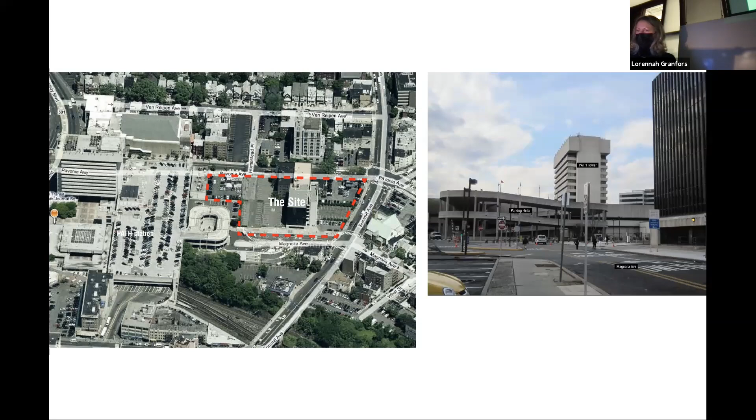I worked on this project with HWKN, in partnership with Handel Architects. What exists there today is two 82-and-change story residential towers. The third one is being built right now. This is the tallest development in Jersey City, and basically the tallest development on the west side of the Hudson River.

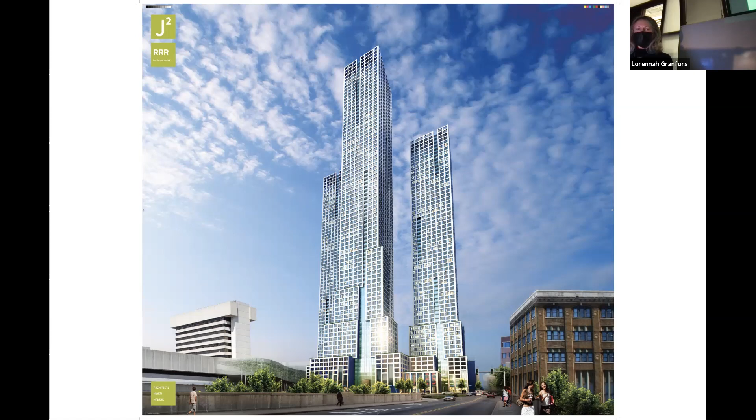It was designed to revitalize the urban void by leveraging connections to transportation and existing population centers. Journal Square is a mixed-use high-rise development awarded through a design competition, which we partnered on, HWKN and Handel Architects, and basically won the project.

What you can see in this image is at street level, but looking down, the three towers rise off of a podium that is central, or that belongs to all of the buildings, and basically functions as the structural platform from which the three buildings rise.

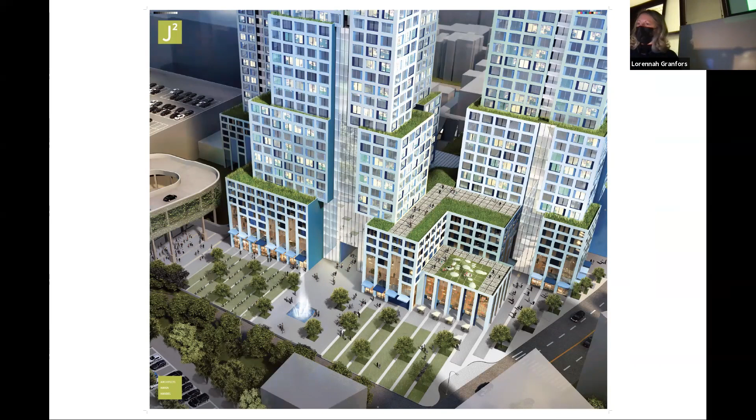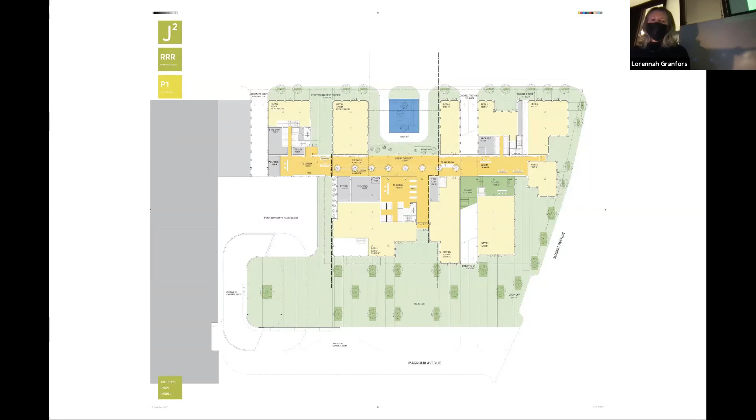This is a ground floor plan, and you can see in the lower left corner the helix that still exists and that we tied into. Part of the challenge of this project was integrating the infrastructure that existed, being the train station, the PATH station, all of the parking that had to be accommodated for, and putting up the three towers.

This is a view at street level, and these buildings really revitalize this area. If you think back to the slide which showed the helix, that was basically a city without a lot of life other than the transportation life that happens in the mornings and evenings. It has totally revitalized these streets.

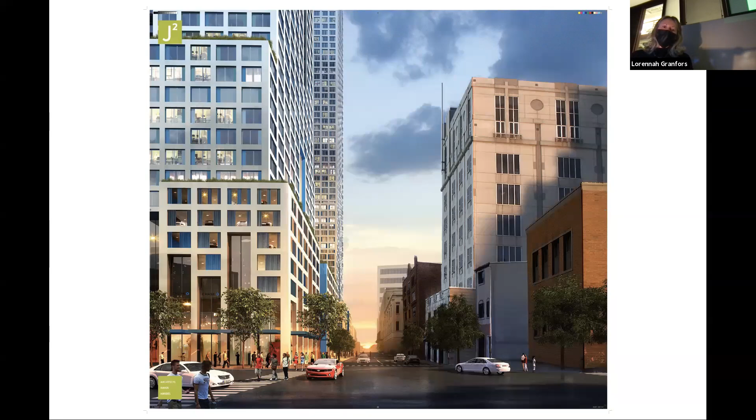The next project that I spent a good 4 years on or so is 400 Park Avenue South. This is a building designed by Christian de Portzamparc, architect in Paris. I worked with Handel Architects—we were the architect of record for the project, and Christian was the design architect, which generally means you do a lot of the heavy lifting, and they come over a couple times a year.

This is a typical plan, which you can see is not so typical—every single plan in the building was different. When I show you what's built, all the walls were angled and they angled back in, so when you took a floor plan at every single floor of the 42-story tower, everything changed. That necessitated a lot of manipulating of plans, but also manipulating the vertical infrastructure throughout the building.

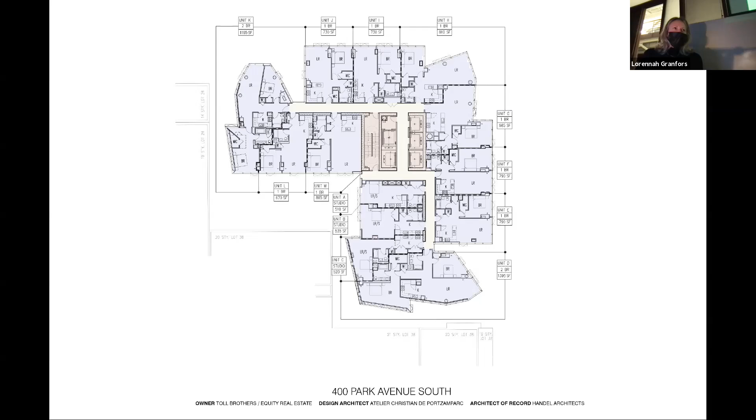Things didn't necessarily stack, which, when they do, creates a much more efficient floor plan and building. This project went through a special zoning process in New York City called ULURP, because it did not adhere to what is allowable by zoning. That took some time to pass, but ultimately they felt this building would really add something special to the neighborhood and revitalize this area of Midtown.

Here are a few photos of when the building was in construction. The photo on the left shows the curtain wall starting to go up, probably a third of the way up the building. The photo in the middle shows the orange construction guards surrounding the parapet—there were two small wings on this building, and the parapets extended up a good 30 or 40 feet or so, poured out of concrete in the air.

That was challenging and fun for them to figure out the geometries of how these ring beams basically form the parapets. The photo on the right shows one of the last floor pours. We were again in Midtown—you can see the Empire State Building, which was just a few blocks away.

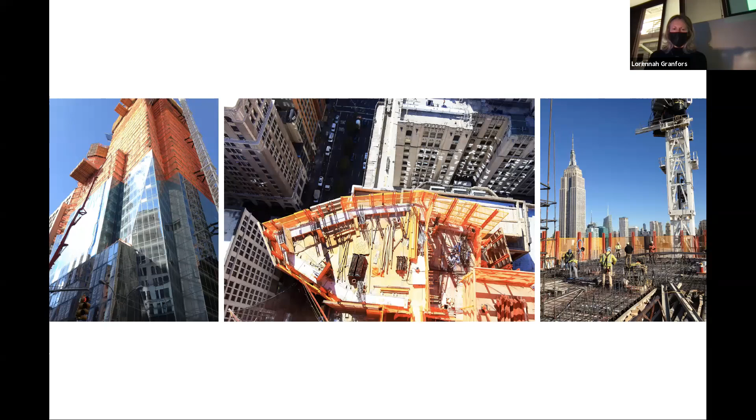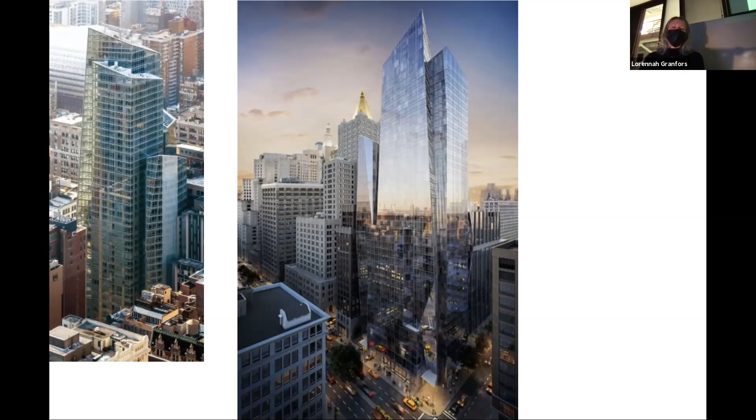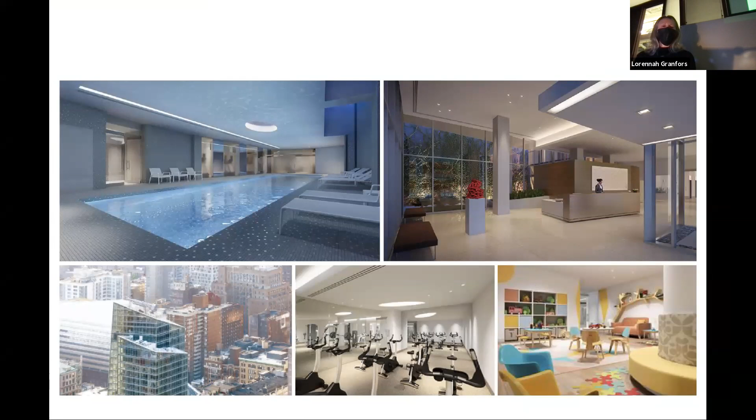So it was in every aspect of this building. At the time, it was probably the most complicated project going on in the city, if not beyond, getting all those geometries correct. And then here are a few photos of the amenity spaces within the building, which has sort of become commonplace to New York City residential buildings, certainly high-end ones.

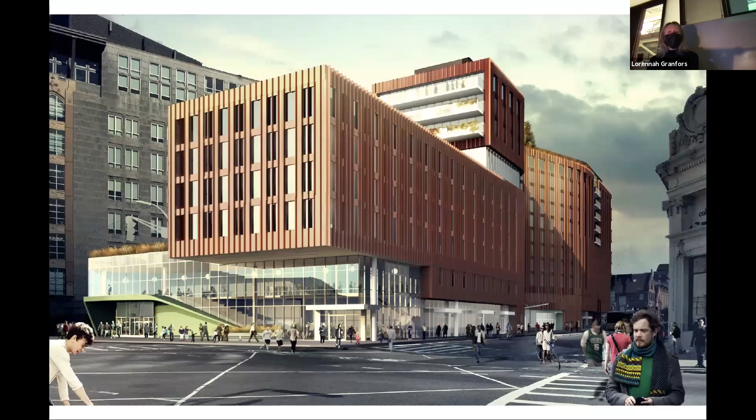Okay, and then the last project, or I guess there's one more after this, but the Viola. This is a project that I did with Handel Architects, and it was also a competition. It is located at the corner of Mass Ave and Boylston Street.

And looking through my notes, it was actually supposed to be completed about 4 years ago, but they are still going through the permitting process. So it's not there. Hopefully it will get built.

But if you're familiar with this corner in Boston, the really interesting thing about this project, and several around Boston, is that it is actually paving over, well, structuring a deck over the Mass Pike. So what exists there right now is open to below. You can see the Mass Pike below what is the street level here.

In the early 2000s, the city of Boston basically identified many parcels around the city that were slated to be redevelopment sites. A lot of them have been built already, and there are some still remaining. So this one will be a great finish to the corner of Boylston and Mass Ave, which is a busy intersection and a notable place in the city.

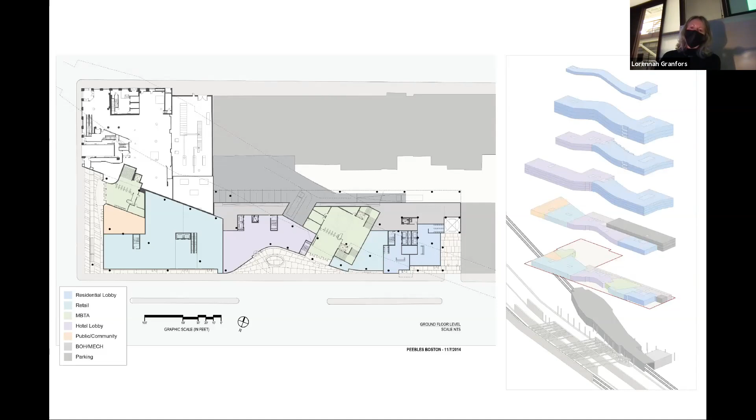The area below that in the cyan color was designated for Berklee College of Music. And as you see the exploded axon going up the building, the purple was designated for hotel use and the blue was designated for residential condominiums. Then at the base of the building, you can see what would be the infrastructure of the T below.

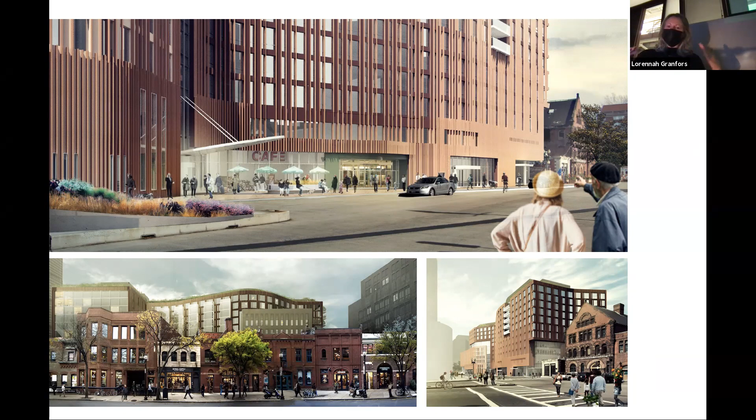And then the bottom right is a view of the front of the building down Boylston Street, and the building with the smaller pitched roof is the Boston Architectural College.

After working for several years at large firms doing large scale urban projects, I wondered what I could do on my own. So I took a stab at that and grew a small practice slowly, doing projects, mostly residential, but also some smaller scale commercial, in and around New York City and Brooklyn. There are a lot of townhouses in New York City that haven't been touched since the 50s or 60s and are in serious need of some care, so that is a bread and butter project for a lot of smaller architecture firms in the city.

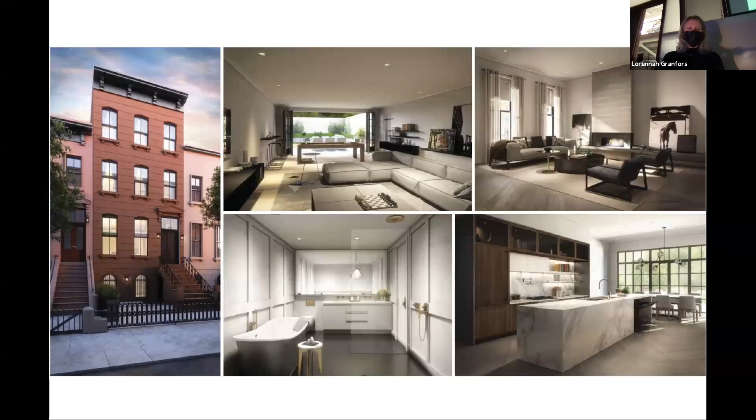This is one that I did in Cobble Hill. And this is another residential interior project on the Upper West Side that is in a multi-unit building. Sometimes I would do multiple units in a building.

Okay, so the story of Mass. Unfortunately, I was not able to embed the video of 60 Minutes on this presentation. I don't know if any of you have watched 60 Minutes on Sunday, but they have been following us around for a good few months. They went to Rwanda, they went to Boston, they went to Poughkeepsie. I believe they went to a few other projects in Africa as well.

And I would encourage everybody to go online and watch it. So I'm not going to necessarily do this justice, but I'm going to tell you, if you don't know, a little bit about Michael Murphy, who founded Mass.

And the way I was introduced to him was actually when I was just out of graduate school and working in Boston. And I went to a lecture, and he was at the Boston Society of Architects, and he was sort of pitching what was to become Mass. He had graduated, I think, or was in the process of, or maybe he hadn't graduated yet, but he was trying to figure out how to become a nonprofit and work on projects that did not follow the typical architecture firm model, right? It seemed kind of impossible and like a great aspiration, but how do you do that?

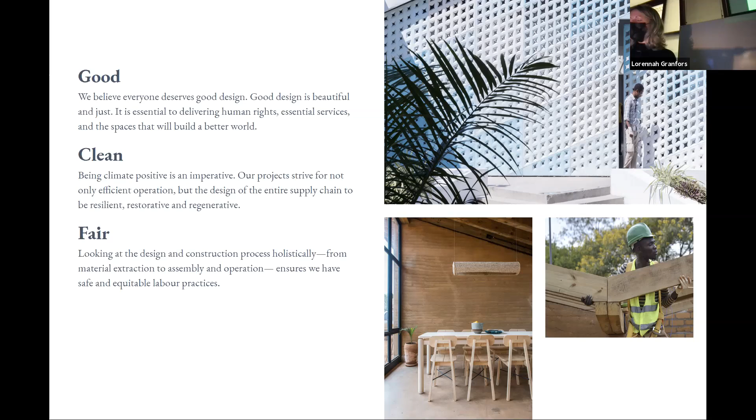Mass is a nonprofit 501c organization. It's the largest nonprofit architecture firm in the world. There may only be a few others. I'm not even aware of any others. But as I mentioned before, this is a very atypical model for an architecture firm, which is why there are so few of them. What this does is we work with charitable foundations like the Dyson Foundation and the Dian Fossey Gorilla Fund, as well as individual philanthropists who seek to support projects such as the ones that we are doing.

This means that most of our clients are also not-for-profit organizations, and they're often mission aligned. Well, they're almost always mission aligned. Otherwise, they would not seek us out. We partnered with over 100 different organizations in 20 different countries.

And we built a unique model of practice. Mass is nonprofit, which allows us to focus on projects, research, and advocacy to push on innovation for social impact. We built a deep bench of expertise in serving other nonprofits to conceptualize and visualize their ambitions and to use the power of design to deliver on those ambitions, as well as unlock the funding that's required to do so.

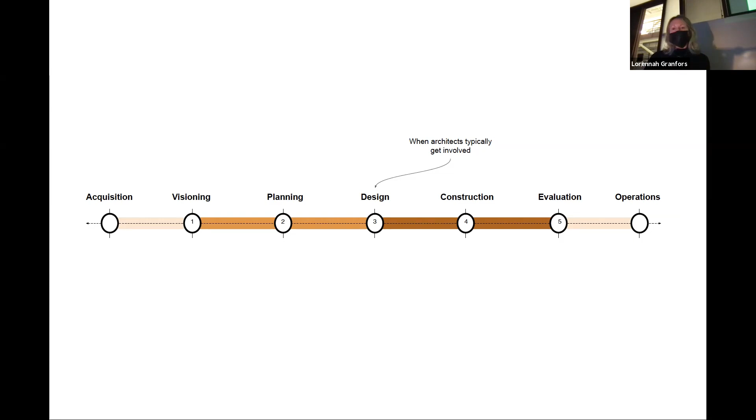And we find partners with people who live in those communities—Poughkeepsie certainly being one of them. So our projects start, they could start 5 years before they actually start, right? There's an acquisition period, a visioning period, a planning period. That happens before design. That often happens as part of a Catalyst fund that we sponsor, or we do a lot of pro bono work too, if the project is mission-aligned with our goals. And then we do the design, construction, evaluation, and operations.

Okay, so the project that Michael basically used as his thesis for graduate school was the Butaro District Hospital in Rwanda.

The Butaro Hospital, following the 1994 genocide against the Tutsi, the government of Rwanda committed to a two-decade rebuilding of the nation's health system. In 2007, Butaro was one of the last two districts in Rwanda without a tertiary care hospital, leaving a population of 340,000 people without access to a single doctor. As part of Partners in Health's mission to bring high quality healthcare to the country's poorest regions, a district-wide plan to increase access was developed in partnership with the Rwandan Ministry of Health. This plan began with the creation of a new district hospital in Butaro.

Michael started working on this project while he was at Harvard, and by missing the proximity—he was not there—drawing a building in Boston versus being on the ground in Rwanda was a very different experience. He ultimately took off a year in graduate school and went to Rwanda to basically experience what the conditions were like, what the community was like, and what could actually be built. Because in Rwanda, there was very little that was there. They did not have anything in the means of skilled labor, machines, equipment, capital, etc.

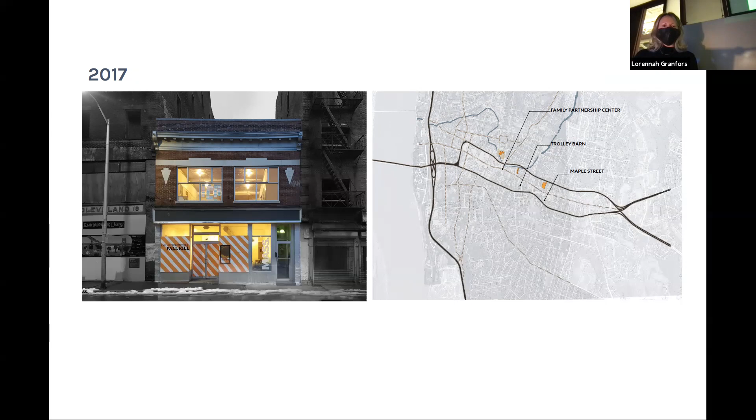This was the first office, and this is when it was standing up, but one of the buildings next to it, I believe the one on the left, actually fell down and fell on top of it and crushed this office. Thankfully, nobody was hurt, but it's sort of an irony about the state of some of the buildings in Poughkeepsie.

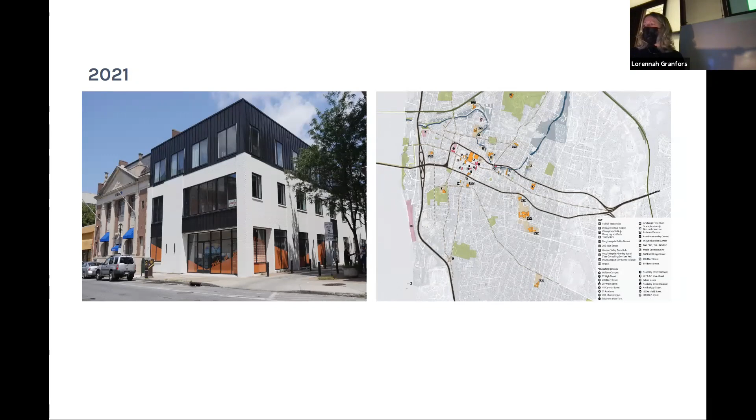This is our office today in 2021. It's a building that we basically built and rehabilitated, and we are right in the middle of Main Street. We have a number of projects at varying scales spread out all over the city and the region.

So we learned three main important lessons from our work in Butaro. One was the power of design to unlock capital in disinvested places. The second was the power of working upstream. And the third was the value of being proximate.

It's important to be where you're working. It's important to be in the community. It's important to be living and working and experiencing what it is that you're doing.

Poughkeepsie was once a manufacturing hub at the turn of the century and produced a lot of paper and textiles. We are located about an hour and a half outside of New York City by train.

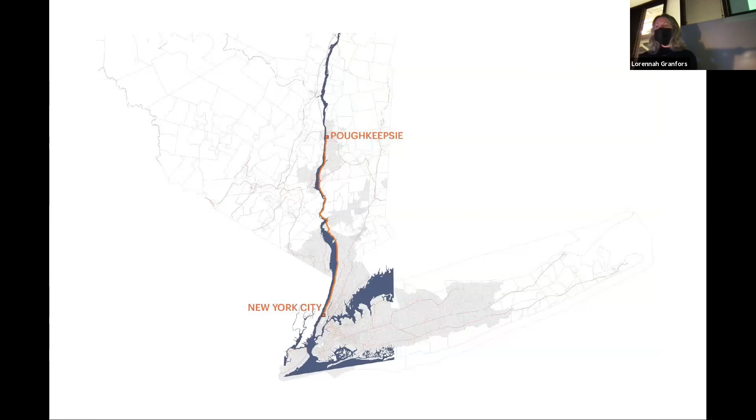Originally, the city plan reflected that of many river cities, where Main Street is perpendicular to the river. When urban renewal in the 60s changed this fundamental order with the introduction of the east and west arterials, it created an enclosure, or an island effect, around Main Street, and it cut it off from the natural pedestrian and vehicle traffic patterns.

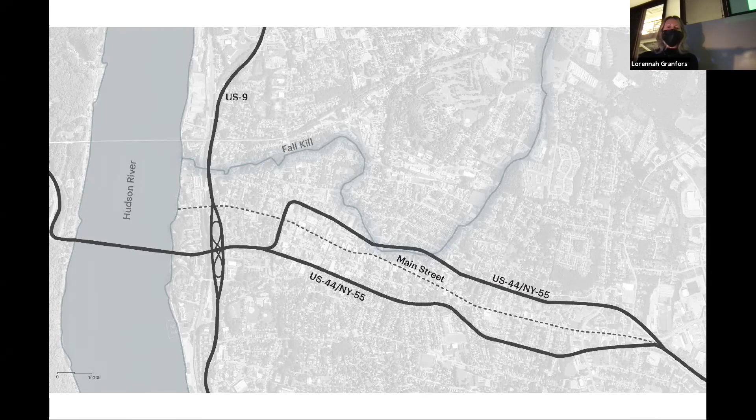So it still remains today easy to come to Poughkeepsie and never actually go down Main Street—you would just circle around this artery and never see the heart of the city.

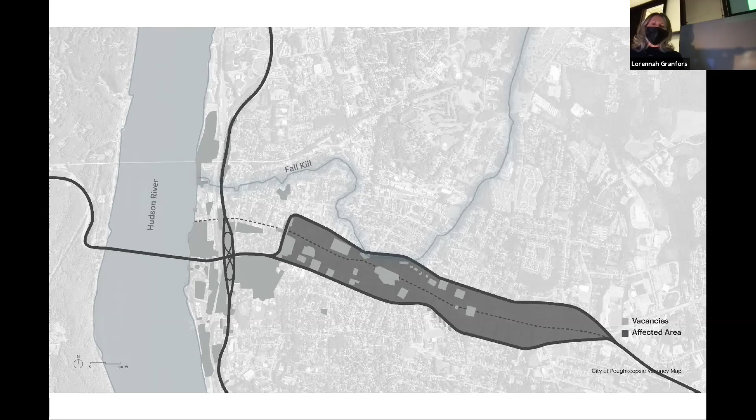So coupled with the departure of manufacturing overseas, this vacancy island basically ensued. Here's a photo of what urban renewal looks like. While the practice of urban renewal may have started with good intentions in the late 1940s to bring economic reform and development to urban areas across the country, it's had a devastating effect in many of these smaller cities, where essentially they were razed and left behind.

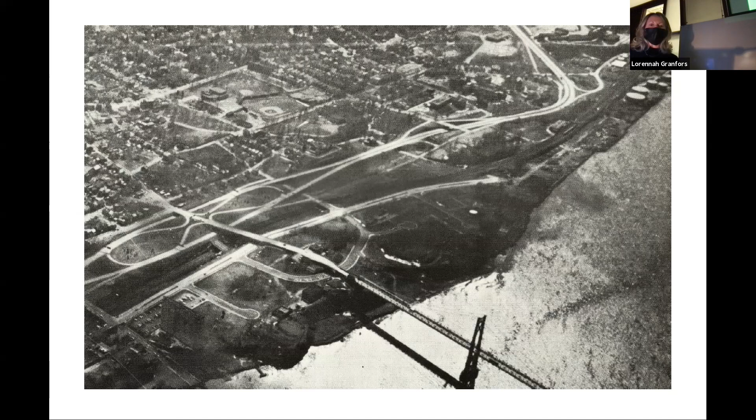You can feel it. But in order to implement this change, or sustainable change, we need to understand how we got here in order to know how to move forward.

Located at the intersection of Main Street and the Hudson River is the longest elevated pedestrian bridge in the world, called the Walkway over the Hudson. The Poughkeepsie Highland Railroad Bridge was originally built in 1889. It transported raw materials to the city in the east. Fire destroyed the tracks in 1974.

So this large piece of infrastructure basically sat untouched until 2009. They wanted to take it down, but that was going to be cost prohibitive—and then what do you do with all of this steel? So they turned it into a pedestrian bridge, and today it brings 600,000 people annually to Poughkeepsie to walk over the bridge, turning aging infrastructure into a valuable asset.

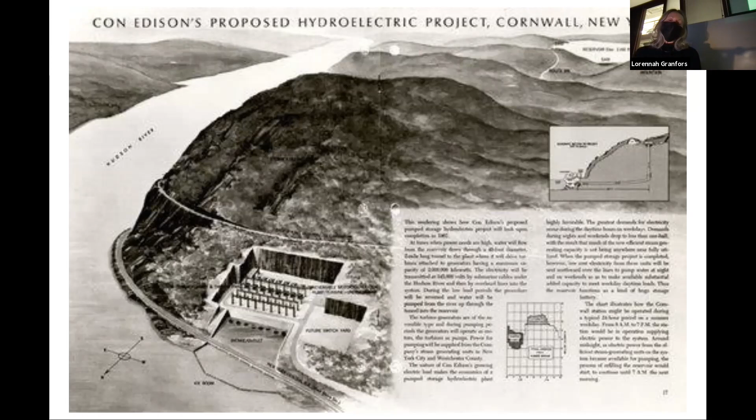If you're familiar with the area, you know how beautiful it is and what a draw Storm King Mountain is. In the early 1960s, Con Edison proposed a hydroelectric plant on the side of Storm King Mountain, which never happened because of community action and the beginnings of Scenic Hudson. Had this hydroelectric plant actually been built, it would have drastically changed the ecology of the Hudson Valley region, and likely not for the better.

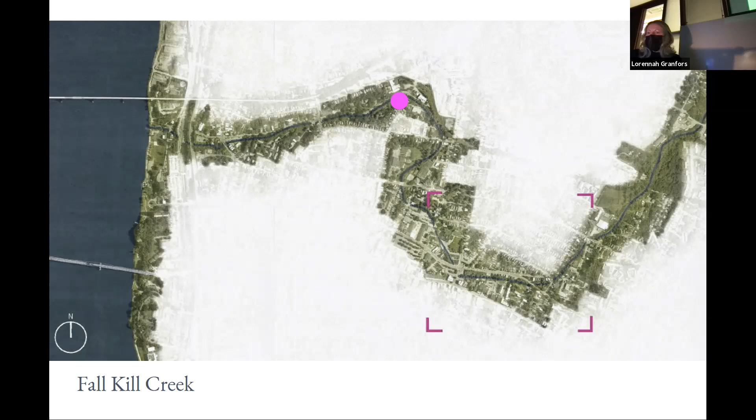MASS's relationship with Scenic Hudson first began through pro bono visioning work that we did for the Fall Kill Creek, a 38-mile long waterway that begins in the town of Hyde Park and flows westward to Poughkeepsie, ultimately draining into the Hudson River. The Fall Kill once powered the city's 19th century manufacturing industry through a system of mill ponds. Today the creek winds through residential properties, backyards, and under streets, and it's largely forgotten.

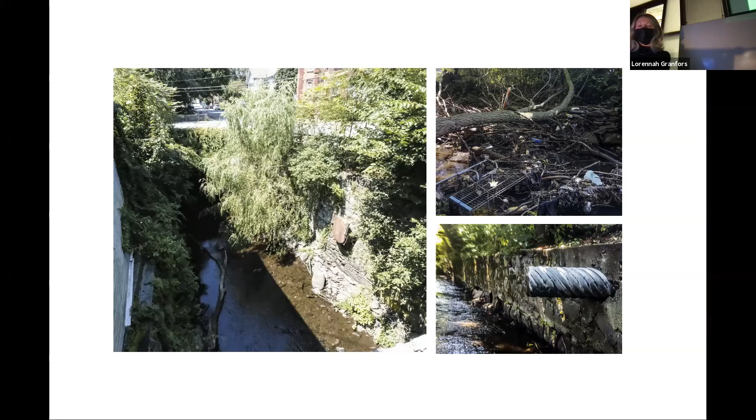Mass became acquainted with the creek more through tragedy, which was that after Hurricane Irene, it flooded the city. It has now become a popular dumping site, plaguing the city as a hazard rather than supporting public enjoyment and the natural wonders that nature has to offer.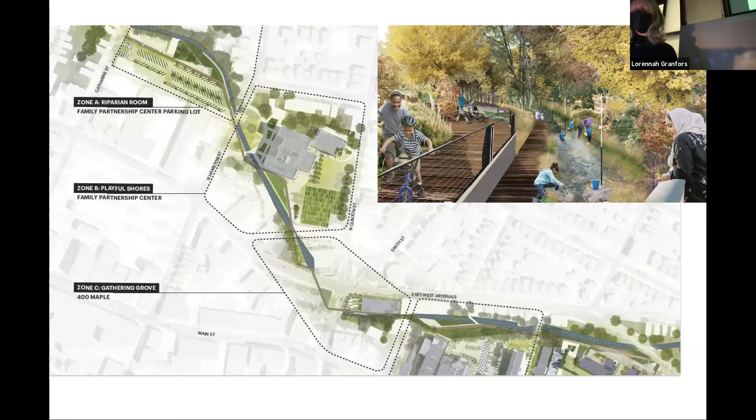Not so dissimilar from the Highline Project in New York City. I guess we can think of this as a low line, but Mass envisioned transforming this creek from a liability into an asset. Mass and Scenic Hudson got together and invited community members to a series of engagements throughout the city to learn about the creek and share ideas for improving public access and stewardship. Here's a plan showing new access points to the creek that will link together existing activities throughout the city and provide opportunities for ecological education and recreation.

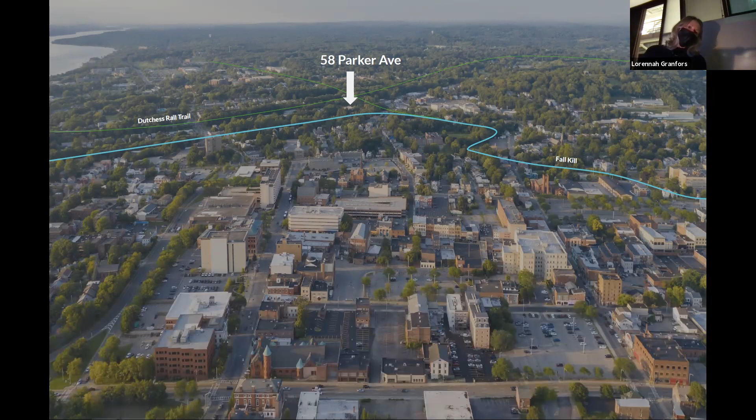Following the work that was done, when Scenic Hudson started looking for a permanent office headquarters, they explored three possible locations and naturally landed at the intersection of the Fall Kill Creek, shown as the blue line, and the walkway over the Hudson, which is basically the Dutchess Rail Trail line.

This is the collection of buildings which is going to be the future Scenic Hudson. The Fall Kill Creek is in their backyard, and it was important for them to think about their home as more than a building, but as an extension of the park system and the land that they seek to preserve.

This group of buildings is an old grouping of factory buildings, and up until 2002 it was operational. It was owned by the Standard Gauge Factory, which built equipment dials for machine equipment.

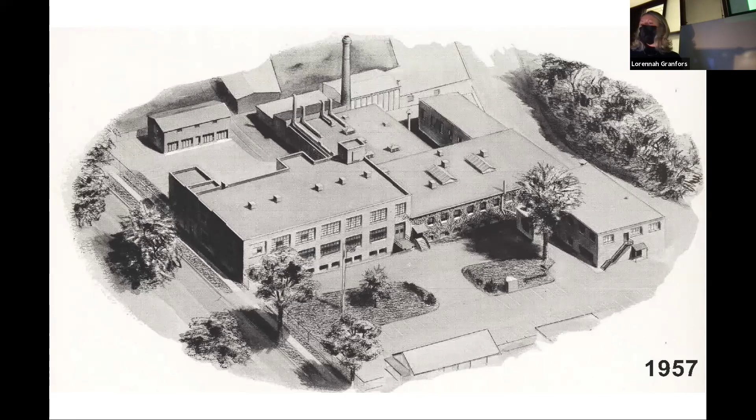What we have to do is basically remediate the site. We're not able to get a certificate of occupancy or revitalize this building until dealing responsibly with the contamination, either by taking it off-site, which we don't want to do because that's basically putting the problem somewhere else. The problem still exists, you're just trucking it away.

So the strategy is to keep as much of the soil on site as possible. We are building landscape berms. We are putting it across the street, which you can see is actually part of their property as well. It is a parking lot which will serve both this building and also visitors to the walkway over the Hudson. We're building up the land, but we are trying to keep it on site.

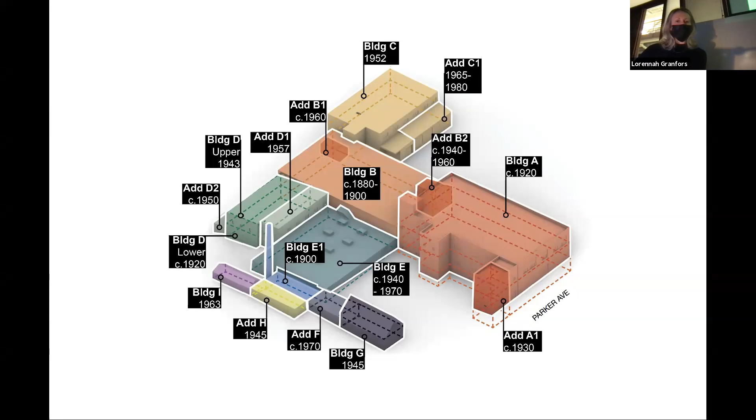This is a diagram showing basically all of the different buildings that compose the complex currently, and this is what it will be following demolition.

This project is not on the historic register; however, it is historically noteworthy, and it may ultimately end up on the historic register. So we are required to keep all buildings that have any historic importance.

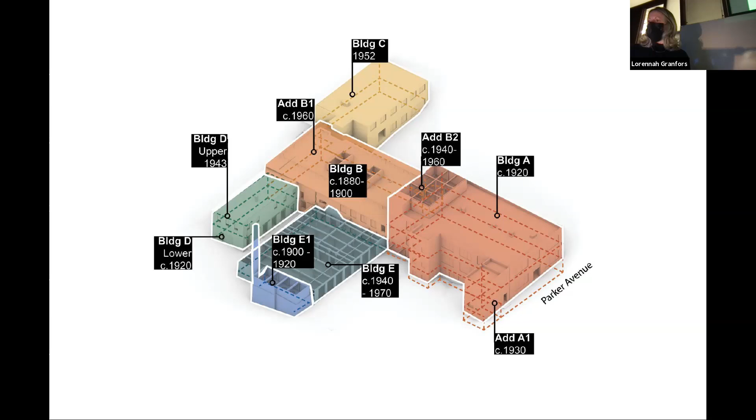So one of this project's more unique qualities is the potential to be carbon net positive on day one, as the embodied carbon costs have already been paid. Are we carbon positive or negative? Basically, we're using a high performance envelope, which takes cues from the historic building, combined with minimal mechanical systems that are integrated with the envelope to minimize energy use.

The center's annual electricity use is powered by on-site photovoltaics. Basically, to be carbon neutral, you have to produce as much energy as you use. We will be putting solar panels on four of the roofs of these buildings, basically to generate the capacity of the energy that we will be using.

And again, because this is an adaptive reuse project, the embodied carbon has already been paid. We're not bringing a lot of new materials to the site.

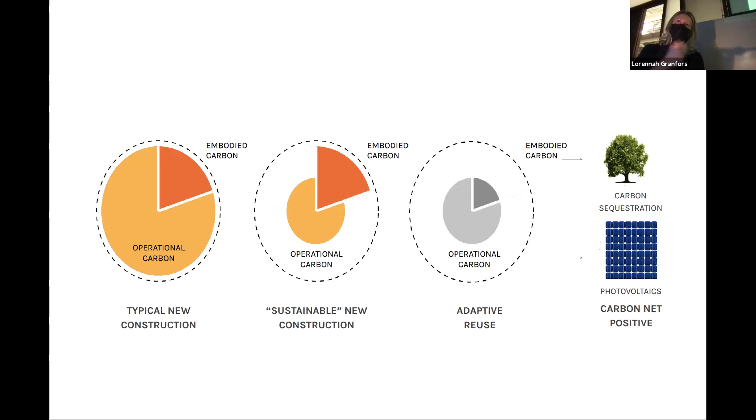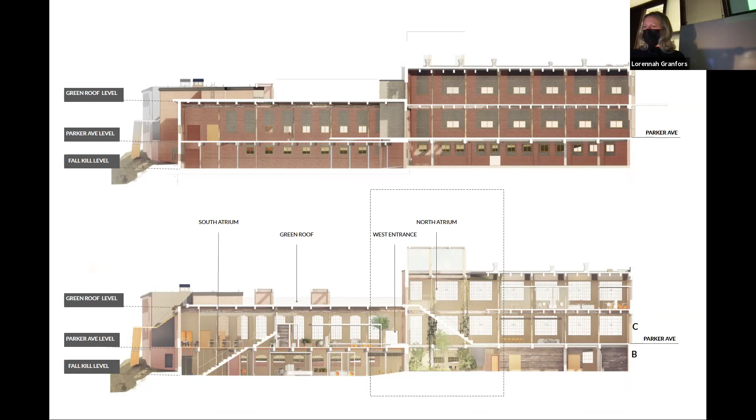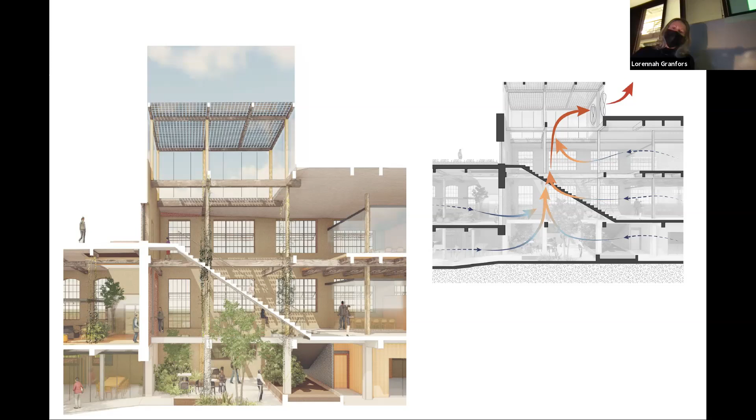One of the main architectural features of the building is this central atrium that's punctuated by a glass pop-up that assists in naturally ventilating and exhausting the building. The diagram on the right shows how fresh air is brought in from the perimeter and then exhausted out the top of the building. Here's another diagram which shows it in a bit more detail.

Typically, buildings are usually put under positive pressure. The question of where does our air come from in the building isn't typically very transparent. Fresh air comes in usually through a highly controlled supply intake somewhere in the facade, and then it's distributed throughout the building through a series of ducts, putting the building under positive pressure. The passive system we're proposing is actually the complete opposite of that scenario.

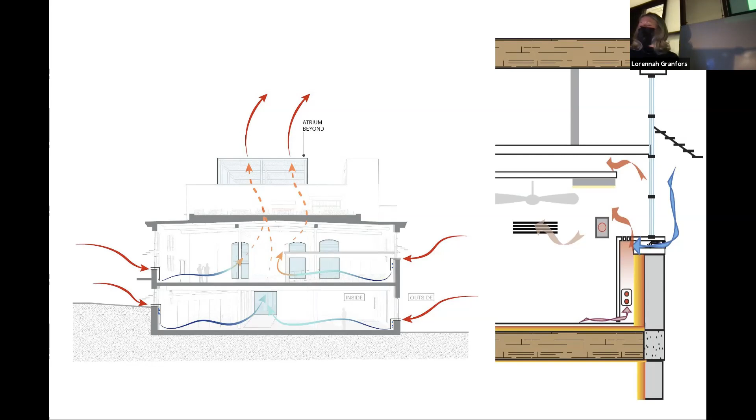Fresh air is brought in through a small trickle vent at the base of every window. It enters a small enclosure that houses a fin tube, which either heats or cools the air and enters the office space. This effectively eliminates the need for energy-intensive mechanical fans, ductwork, and refrigerant typically used in a VRF system, and significantly reduces the amount of energy consumed and therefore the carbon footprint.

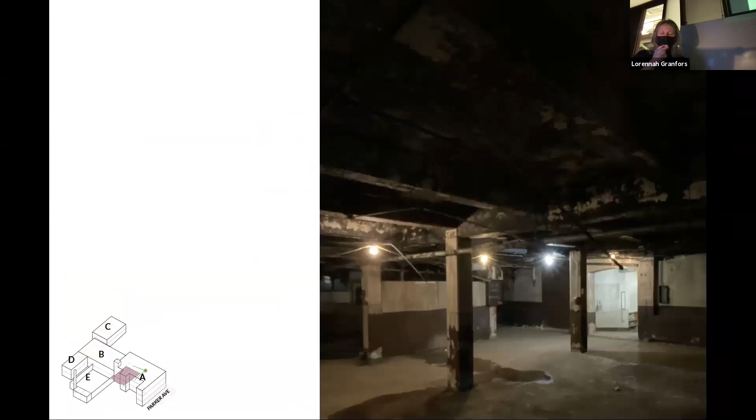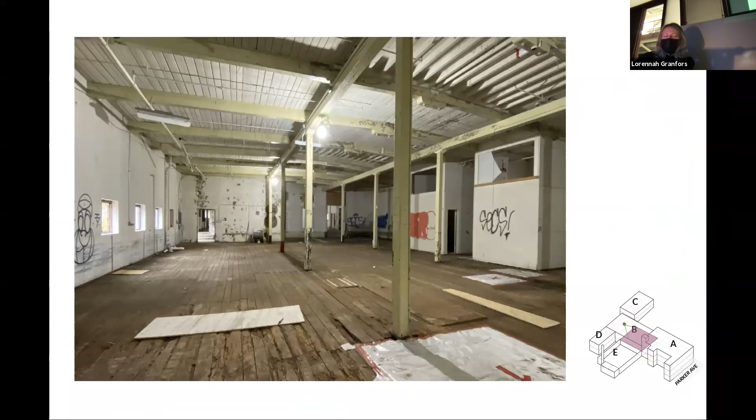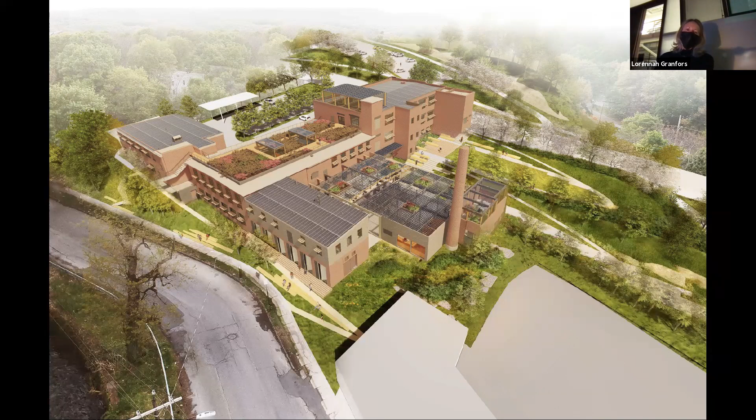This is a rendering of what is being proposed and what we hope that Scenic Hudson will look like. You can see all the photovoltaics on all the roofs, the green roof, and the windows being restored. Okay, and the last project is that of Stone Barns, located in Tarrytown, New York.

As I was driving here, I remembered that I didn't put in a photo of what Stone Barns looks like, but I think you can see in the background—it is a good example of the building structure, the buildings that exist at this very, very special farm in the Hudson Valley.

Stone Barns Center for Food and Agriculture is part of an 80-acre nonprofit farm and nature preserve developed by David Rockefeller. The organization has been shaping an ecological food culture for the past 20 years, directly tied to place, local conditions, and the seasons. It's been doing so in partnership with a world-class restaurant on site called Blue Hill. There's a Blue Hill in New York City, and then there's Blue Hill at Stone Barns, led by visionary chef Dan Barber. If you're not familiar with Dan, there's a Netflix documentary series from a few years ago—he's, I believe, the first episode, truly, truly inspiring.

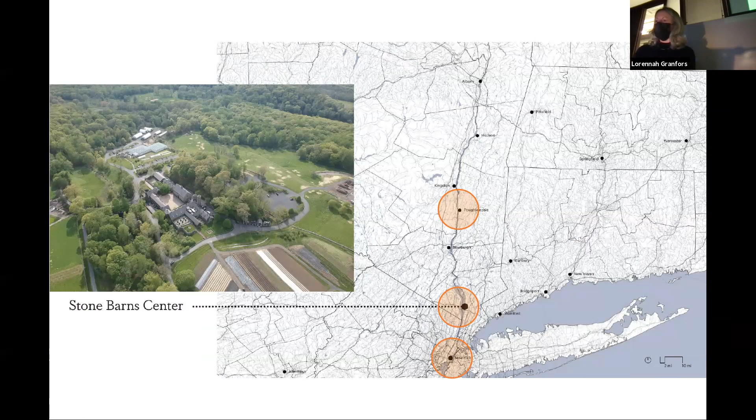If you've read Dan Barber's book The Third Plate, you know about his theory of third plate cuisine. It's a dish or a meal that can only exist in its time and place. One of the great challenges and joys of this project has been correlating the understanding of this approach to food and farming, and then to architecture. So how can we design a building that can only exist in its place and time, a building that nourishes people and gives back to their ecologies rather than taking from them?

We correlate the first plate with the past. It is industrial without season or place, tastes the same and looks the same everywhere, optimized for uniformity and efficiency. The second plate, the present, might look a little different or not, but it's a shallow reinvention requiring intensive inputs, prioritizing consistency, and often opaque by design. The third plate, the future by definition, only is possible in that place and time, and answers to regenerative, complex, and balanced feedback loops at multiple scales.

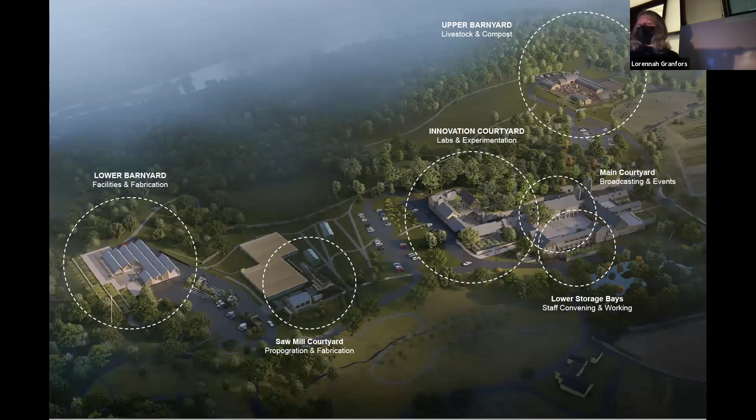So what are we designing at Stone Barns? We are looking to design 3 new barnyards that will distribute varied activities around the 80-acre site. The lower barnyard will be a new fabrication and facilities workshop. The upper barnyard will be a new livestock center, and the innovation courtyard will serve as the new hub for experimentation, education, and innovation. Mass has spent the last 2 years learning about and defining the intricate needs and aspirations of the center.

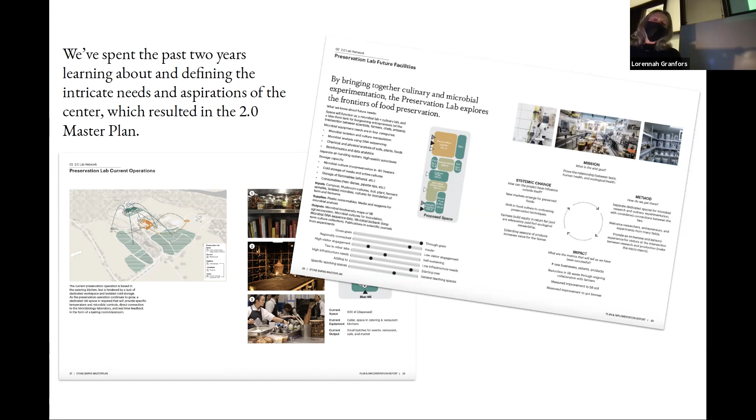Which has resulted in a very large 2.0 master plan. We actually finished yesterday the schematic design phase of the project, and we will be moving into design development in the new year.

So what sustainable strategies have we employed or can we employ, given that this is new construction? The project is being designed to be net zero — again, we are producing as much energy as we are using. That in and of itself is a very long process of measuring and calculating the data: what systems exist right now, what systems are we proposing, and how do we lower the amount and capacity of energy that they're using right now?

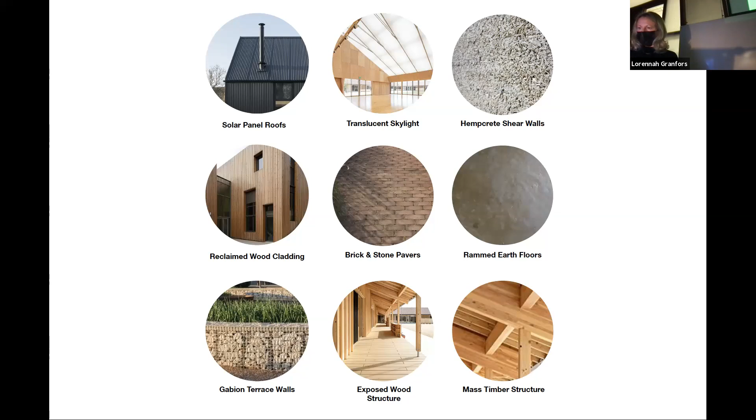The idea of a root cellar is one that has resonated strongly in this project. One of the challenges they face is basically solving for March and finding a way to extend the livability of our food. We live in an area that has 4 seasons, and you can only grow for half of that time. So how do you increase the length and life of the food that's being grown? Because the food grown on the farm is also the food served at the restaurant — it's fully farm to table.

So by using the earth itself and the thermal mass of soil, we've used this architectural typology as a point of departure. We think the root cellar built in the hillside gives us a precedent here on campus — a place where we can learn from the past, from indigenous knowledge, and pilot a future of architecture that learns from and builds upon the historic infrastructure that already exists in this place. The photo I showed at the beginning of the presentation with the stone wall — that is a wall and door that leads into a root cellar that is on campus here at Stone Barns.

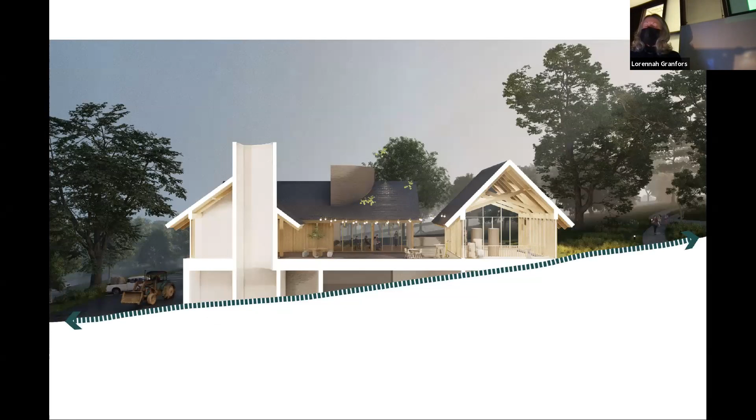The 80-acre topography of Stone Barns is that of a steep hillside, and the original Norman-style stone buildings took advantage of that hillside by building into it. In the same spirit, the new buildings will do the same and leverage the thermal mass of the earth like a root cellar.

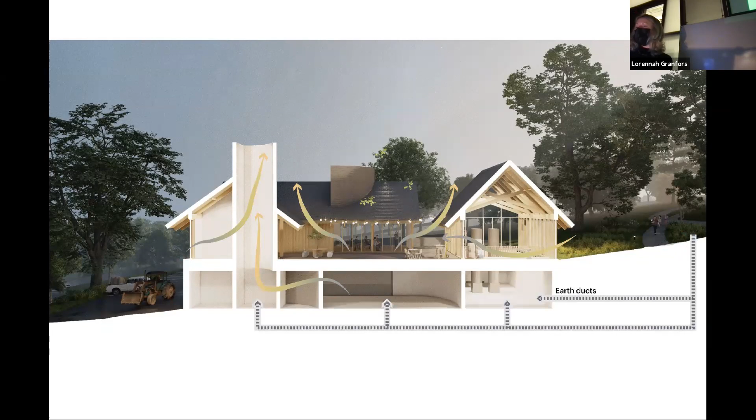Passive heating and cooling will be made possible through operable windows and also a large underground earth duct that acts as a plenum for tempered fresh air to enter the building, offsetting the need for intensive mechanical systems. Facades and roof systems take advantage of the sun and daylight for the winter and shading in the summer, with solar panels on the south and east roofs.

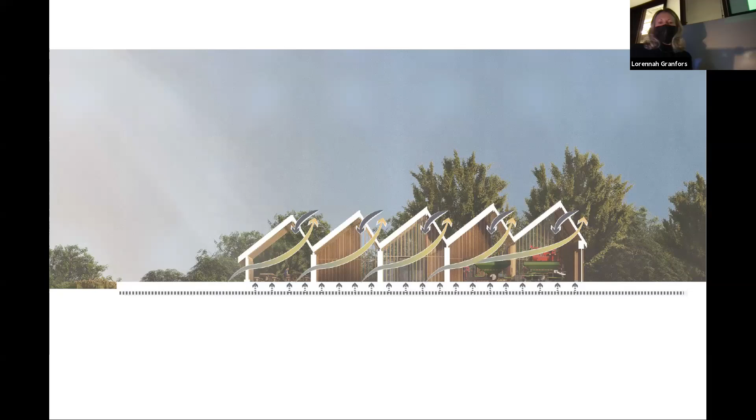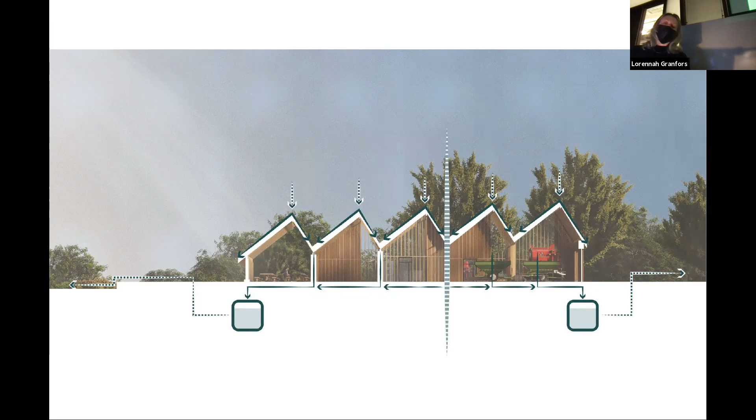We are implementing the sawtooth roof for some of the structures, optimizing that roof structure for passive ventilation and radiation year-round. Finally, the rainwater retention and system design is focused on rainwater capture and pervious surfaces that allow water to infiltrate back into the land and restore the wetlands, and not ever reach the municipal sewer. And that is it.